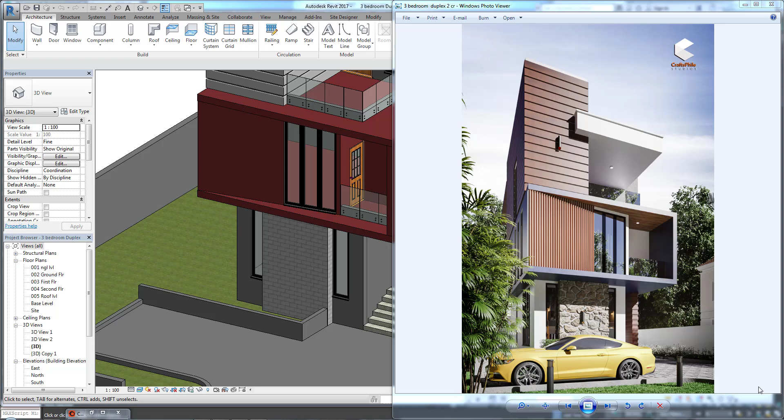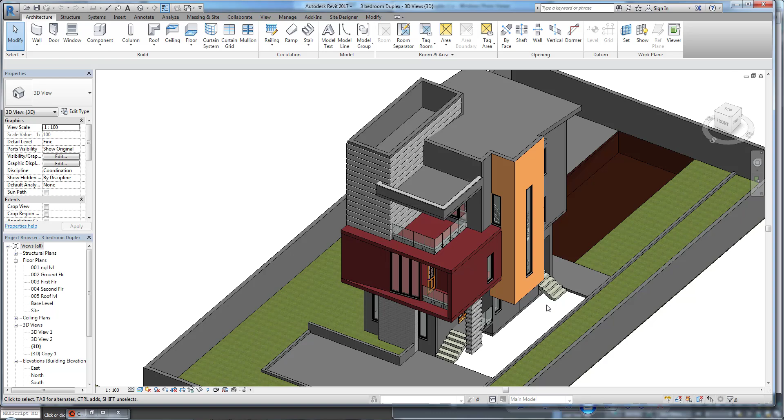If you notice, the model was actually done in Revit. It's quite a simple model, but it's unique because it's just the way it is. The major thing is that we use Revit for most of our works because it is easy to use and helps us quickly put ideas together, and majorly we do design as well, so it helps us manage both 2D and 3D together. That is just why we used Revit. After you're done with Revit, of course you bring it to 3D Max.

In 3D Max you can see we try to create a kind of environment. We put buildings, trees all around, and many of these trees are generated with Forest Pack, and also the grass was generated with Forest Pack as well. We just try to mimic something that is relatable.

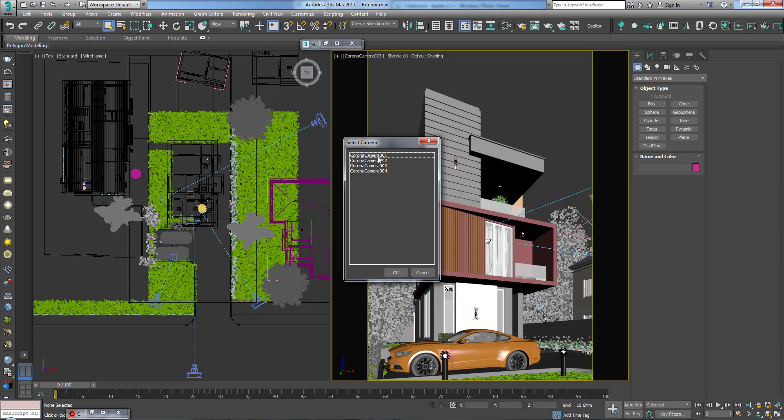After that, the next thing was to place the camera. Of course, the cameras are Corona cameras that we just placed, we didn't change any setting on it, we just placed it and set the frame. So this frame is like this. We have another frame right here, but we are not seeing it yet. Let's just go to the major frame that we need to work on, which is actually camera 3.

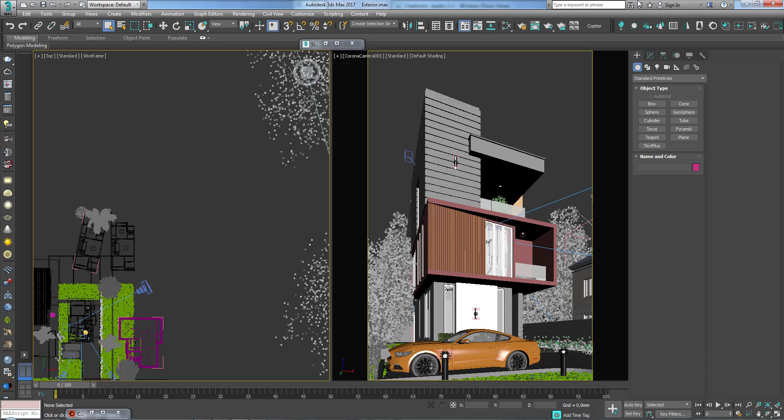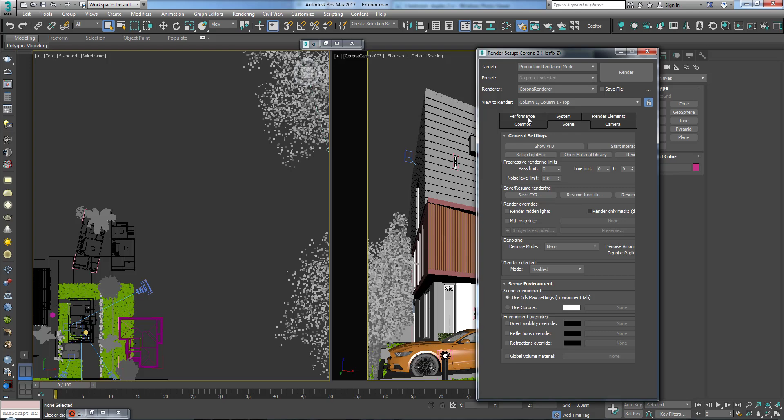Now that we have this and we have set our environment, the first thing to do is to never forget to change your render setup to Corona, because if you import from Revit it will always default to Arnold, except if you are using a version of 3D Max that doesn't have Arnold, maybe 2018 or 2019. So now we are going to change to Corona render, and we have different common tabs.

This is quite very important, the output size. So we set this output size to 1200 by 1800. That works well for us, and the scene, everything is just like this.

One of the things that Corona developers say is that you don't have to tweak anything, you don't need to do anything, you just need to start rendering, and that is what people like most about Corona. So now if I just click on this icon here, which is start interactive rendering in Corona VFB, what it means is that it will start interactive rendering in the Corona Frame Buffer.

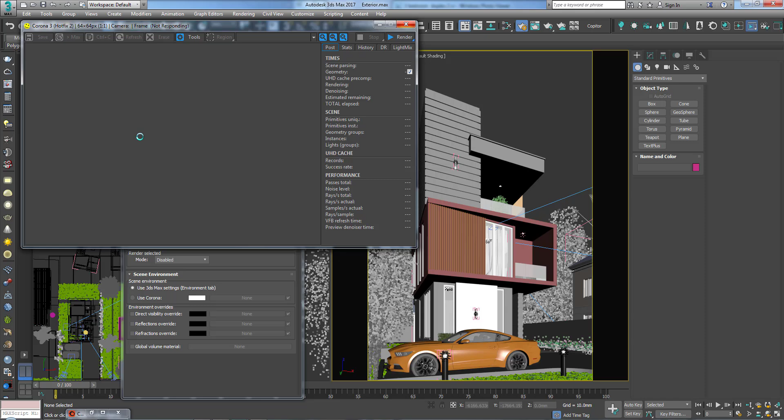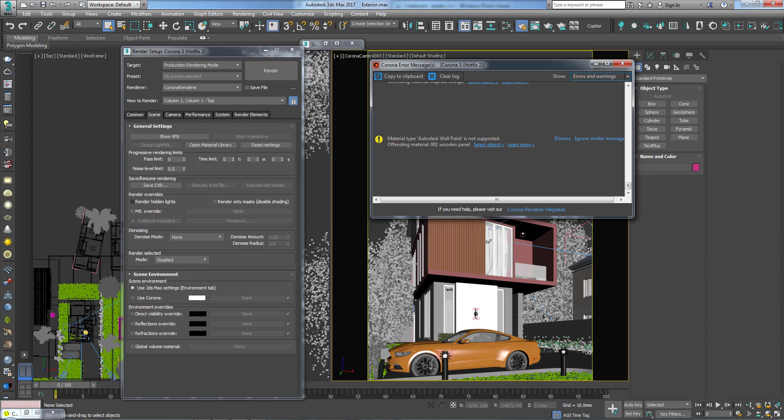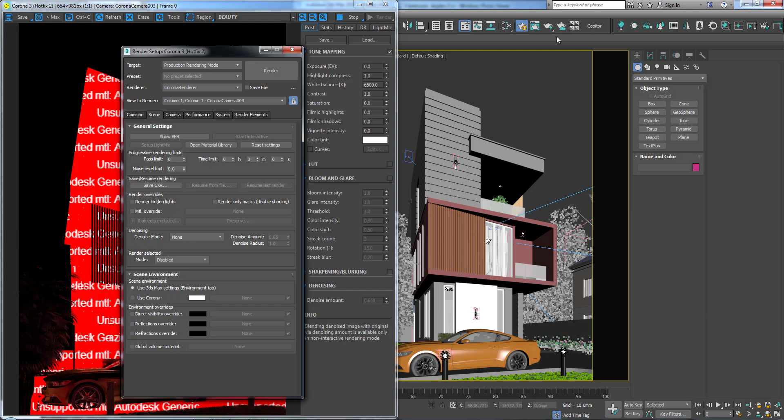It's quite simple. What we can do is just close and come back to the render setup here. In the render setup, just click on material override, click in front of it where it says none, then use a material, Corona MTL, to override everything. So when you use the Corona material to override everything, this is what you're going to have.

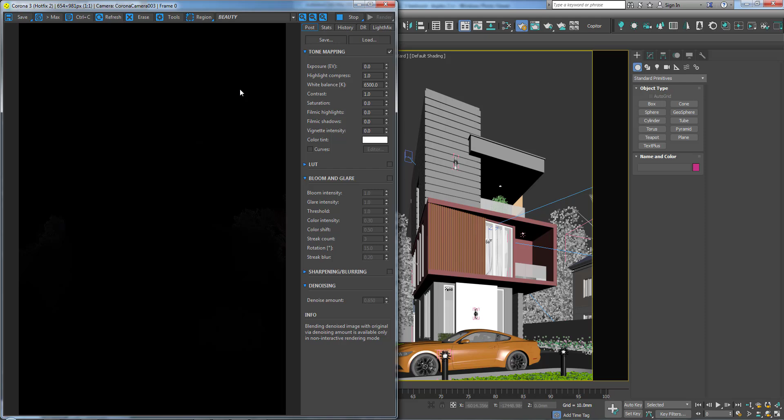Everything is dark, so there's no light in the scene. So how do we put light in the scene? We are going to be using HDRI for this. The HDRI that I'm using was gotten from HDRIHaven.com. I'm not a fan of HDRI, but I find this one to be really interesting, and this is it.

So for the final render, I'm going to be using the 16K, but for a light test, just to test the light, I'm going to be using the 1K resolution. So I have both of them here. You can see Kiara 4 mid-morning, 1K. So I'm just going to drag that.

But instead of dragging it, I'm going to right click here, choose map, choose Corona, choose Corona bitmap. Corona bitmap will lead me to where I can get my bitmaps, and I'm going to just locate it on my computer, I think I have it now in my downloads. And you can see we have this 1K resolution.

This is the one we'll finally use... no, not this. This is the one we'll actually use for the final render, but let's just pick the 1K resolution for now. I'm just going to click OK, I'm not changing anything, so this is the 1K resolution.

So how can we use it? Unlike in V-Ray where you create a light and put it inside, in Corona it's quite simple. All you need to do is minimize that and come to rendering, choose environment, or you can just press 8 on your keyboard to bring it up. So to see how it works, I'll reduce the frame buffer, then I'll just drag this Corona bitmap and drop it into the environment slot, and that is it.

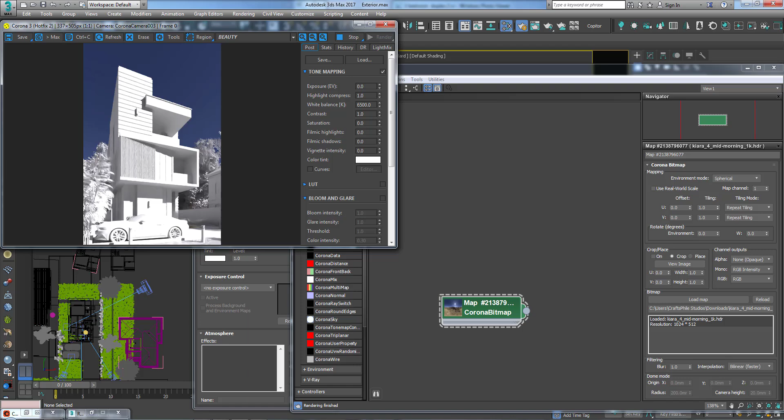So it will automatically be changed to environment map, and you can see we have spherical environment now, and this is the way it looks. If you notice, I actually like the way it looks.

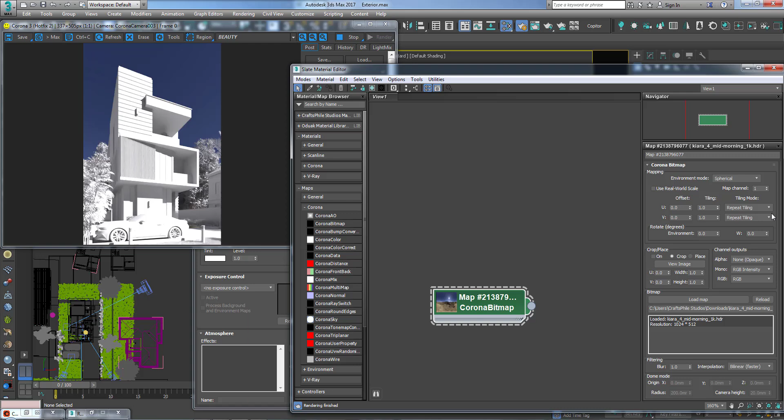I didn't change anything, you can see that's the way it looks, and I'm okay with it. But in case you want to change the rotation, you can just click on the bitmap, even preview it, right click, open preview window, so you see the way it looks. So you can change the degree, 10 degrees.

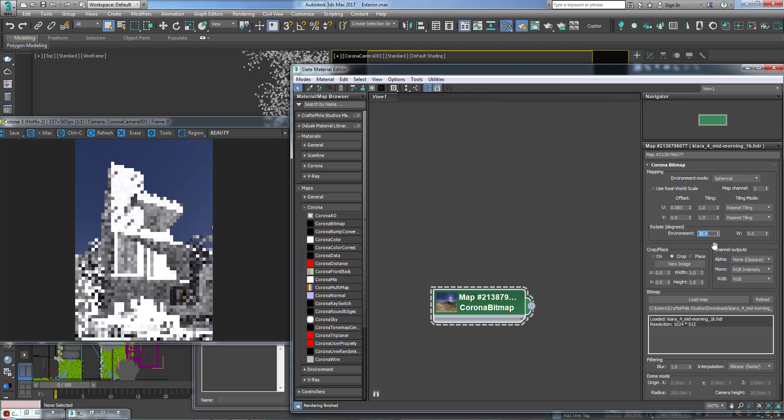We'll be seeing the live updates. Not 10 degrees, 15, 30. The sun will be moving, and you can see the way it is moving here, until you get the position you like. I think this one might work, or it looks like if I put it on 25, you can just play with it anyway. That is just the way it works.

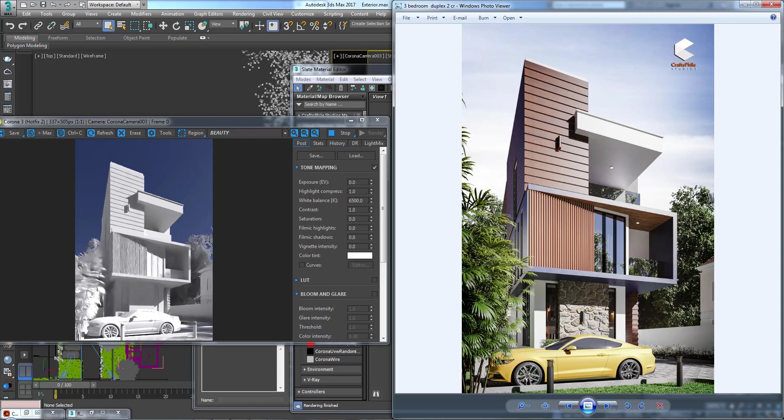I think I like this now. It's totally different from what I have here, but yet it's cool. I can drag it like this. So that is how to create the lights.

Now, normally in a V-Ray tutorial, I always teach that if you want to use it, you need to use this camera setting and all that. But you can actually not bother about that. You can just come to post here. Post helps you do some major post production on it.

So the exposure value, I can put it on 5, for example, and you can see how illuminated the scene is. If I put it on 2, I think that's okay for me, but so many areas are overexposed, so I can come to highlight compression.

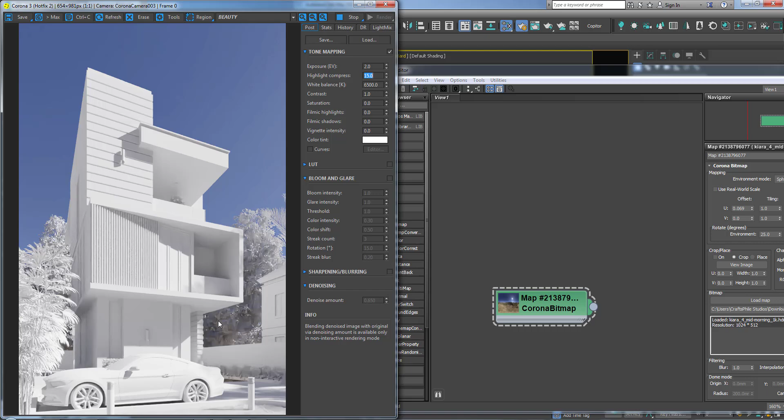I begin to reduce the overexposure on the image, and you can see I have a bright image, but I'm reducing the overexposure. So I put it on 15, and any value after 15 does not make sense because you will not see a significant improvement on it.

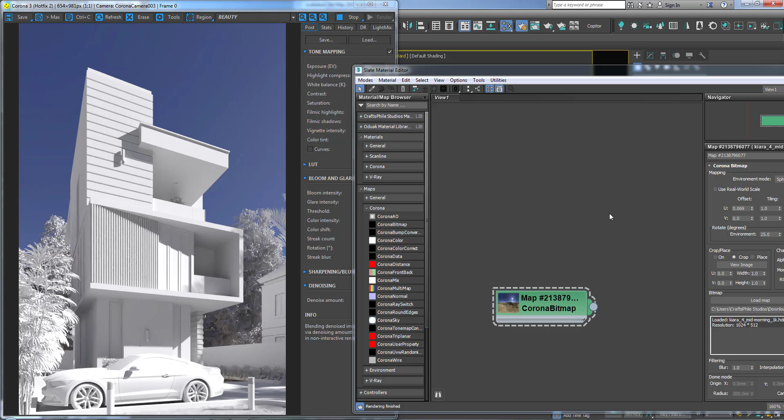On this, I think I left it at 1 here, and this at maybe 1 or 2 as well. So I have something strong like this. It's quite simple and easy. You don't have to be a guru to actually know how to do this.

That is just about lighting for you. If you have any other thing you want to do about lighting, of course you can go ahead and do it. But this is quite simple and straightforward in how to use Corona lighting.

Of course, what if you don't want to use HDRI? I'm not a fan of HDRI like that, but in this case I find it very, very interesting. So what I'm going to do is come back to the displays and choose Corona Sun, drag it. That's the way it works.

I put that there, so of course I can change the rotation to whatever I think is okay for me. If I do that, you'll see there will be some kind of conflict with Corona Sun and the HDRI. I've seen a lot of people using both HDRI and the Sun together, and I cannot say it's wrong, but it is not useful in all situations. You need to understand the situation that is making you use it.

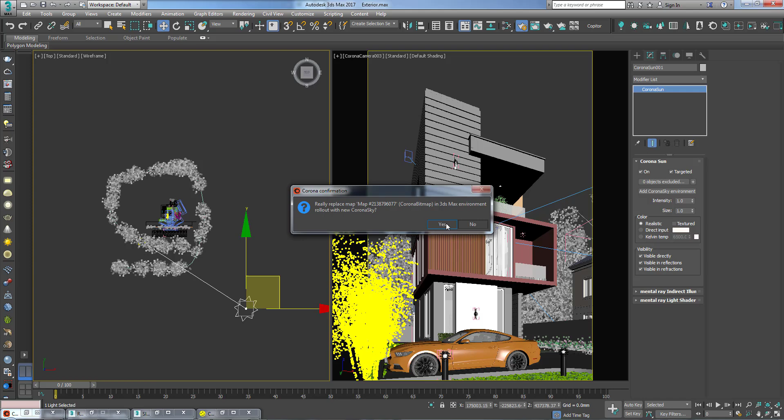So in this case, I'm not going to use them together, I'll pick the Sun, come to modify, and click add Corona Sky environment. It tells me there is a map in the environment, which is the HDRI that we added, so I'll click that it should replace it.

Now let's see what we have. So we have the Corona Sun now. You can see the Corona Sun is quite crazy, everything is blown out. Let's try and put 10 here first. You can see, even though our highlight is compressed and overexposure is reduced, the image still doesn't look good.

So I can actually put this exposure on 0, or let's say -1 or -5. Oh, -5 is quite too much, so let's put it on -2. I think -2 is okay. And I can begin to set it and try to find a perfect place for my Sun.

So that I'll see something cool, but it all depends on you. One thing I'm noticing here is I don't have a sharp contrast, unlike the HDRI. If you want a good contrast, you can set the contrast value here, let's set it to 5. Now you can see we have something similar.

Whichever way you are trying to use, none of them is bad. Okay, that's too much, so you just play with it. It's actually interactive, and that's one of the things I like about it.

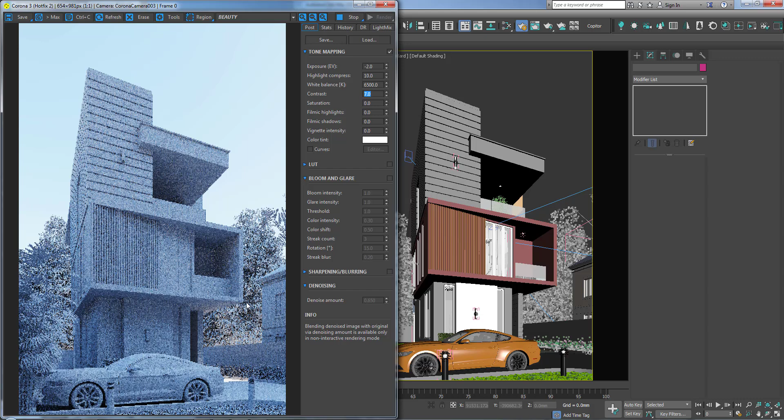Now I'm going to go back to the HDRI because that's actually what I used, so delete the Sun. If I delete the Sun, you'll still see we have illumination coming only from the sky. This also really helps if you want to do an evening kind of setup, you can use only the sky to mimic that.

That is really, really nice, that is cool. And of course you can do that in V-Ray as well. So now let's just go back and go to the exposure control and add the sky from the HDRI.

And now we should not forget what we did, which is actually 1, 2 I guess. I think this is on 0. Oops, sorry, this is on 1. Okay, this is on 1 as well. I think this is on 1 as well. Okay, you can see everything is okay. I like highlight compression now, I can actually put it on 2 or even 5. Okay, then put this on 2. I think I'm okay with this for now. If I have to change anything, I can change it while I'm rendering.

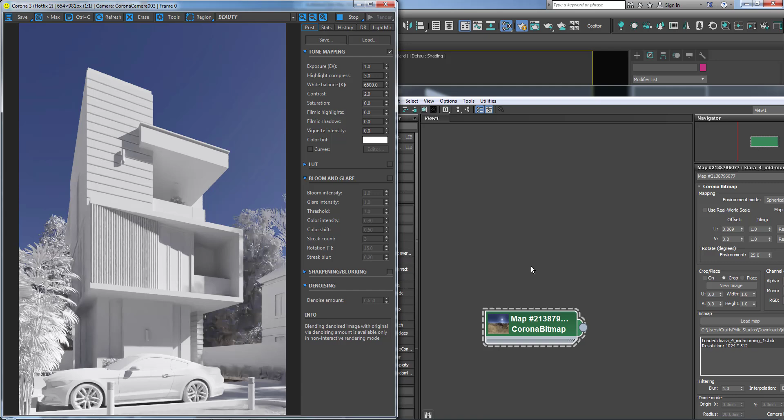So that is just the basic lighting setup. So we need to just move to the material. Looking at this time now, I think this tutorial is going to be more than 1 hour. So let us see what we can do.

So for this, maybe what I'll do is stop this tutorial right now just for the lighting, and in the next session we are going to be looking at material so that the tutorial will not be too long.

One of the things I also want to tell you is that if you notice while we are rendering, we are not seeing some details, but everything looks smooth. It is because Corona by default is using NVIDIA denoiser, which helps you quickly remove noises from your scene so that you will see clearly. And this is what they call look development.

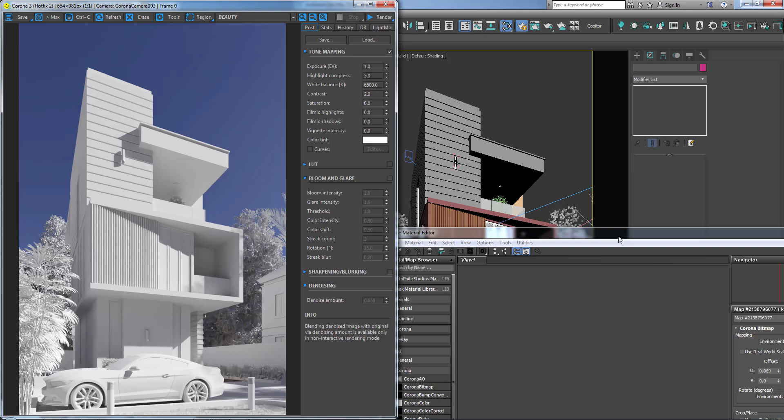Before I stop as well, I'm going to just stop the interactive rendering and quickly show you how you can create a pavement with gravel using Forest Pack, if you are not familiar with Forest Pack before. But if you are familiar with Forest Pack, of course this will not be an issue for you, you already know how to do it.

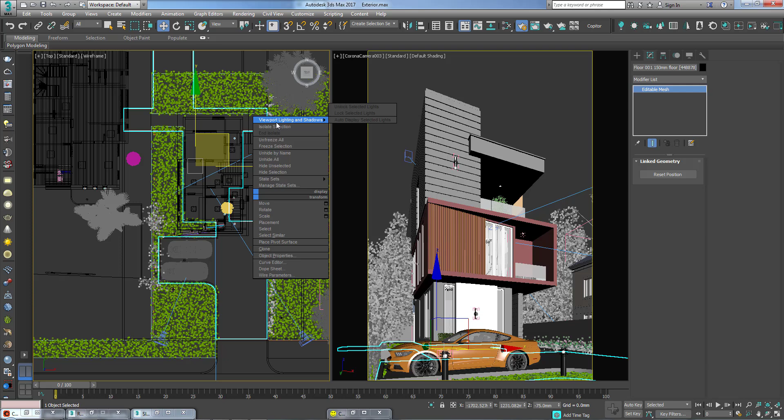So a space is left here. If I pick this floor, I can just isolate it. So I left a space here for the gravel. I can just come into the 3ds Max command panel here, pick shapes, and click lines.

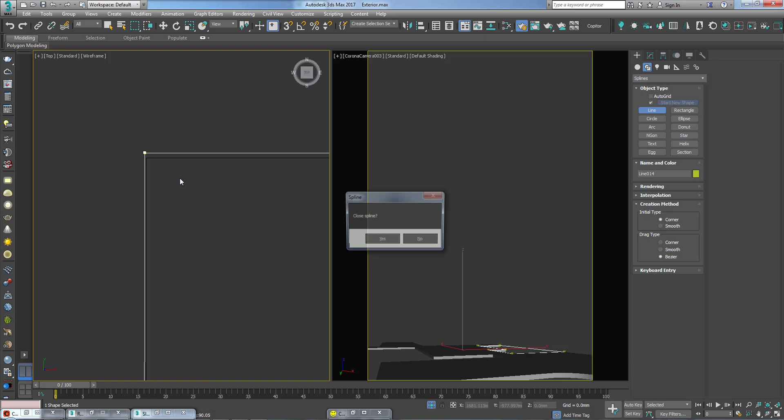So I'm going to press shift and just start. So put it here, put it here and here. So it formed a closed spline. And also I'm going to create another rectangle, just put this one by the side for now. We are going to see what we want to do with that.

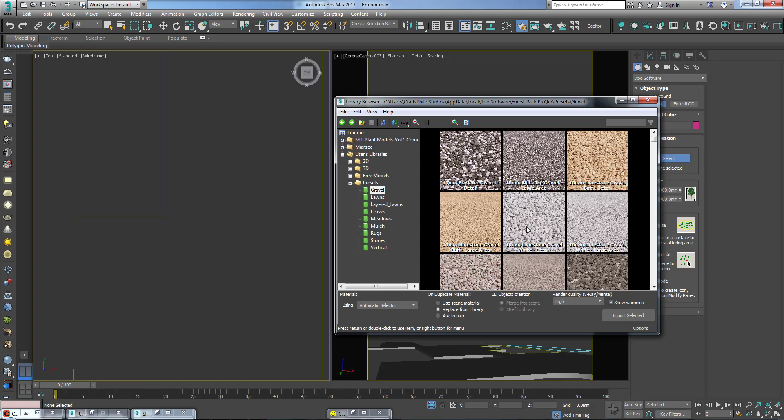Now you can come to iToo Software Forest Pack, then you select. Of course, I loaded some of my Maxtree models into Forest Pack, but by default you should have some of the presets, so gravel - I like to use this one, I don't know why, I just like the blend of colors on it. Of course if you want just a white one, you can see them here, but I'm going to be using this one. So just select this.

Click OK because I'm using millimeters on my computer, so the unit is quite different. So now it generates that gravel for us.

Now the next thing to do is to work with this. I'm just going to apply a floor generator on this. So you see the way it looks now. I'm going to place it here. Let's see how big I want it to be. So I don't want it to be too big.

So if I come back to the rectangle, I can actually reduce it to like 1.5. Okay, so I want it to be 1.5. So let's go back to the floor generator. So here I'm going to put 1.5.

And we are not seeing it well, so let's come out. The offset, the minimum offset, I will put 0, so there's no offset. The width, I'm going to put like 600. Let's see, 750. Then we use grout, so for the grout I'm going to put 100mm.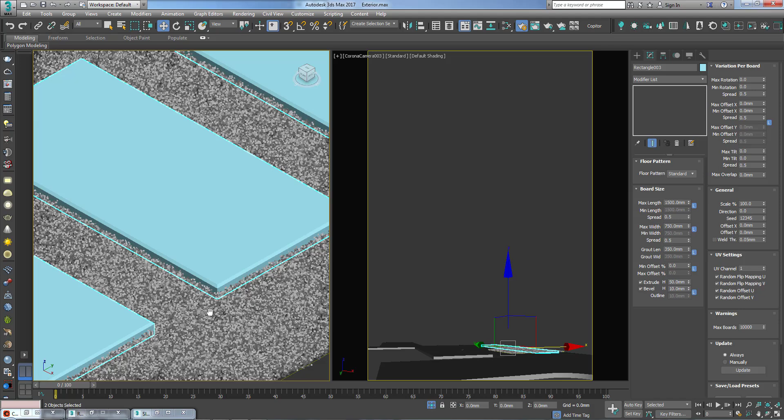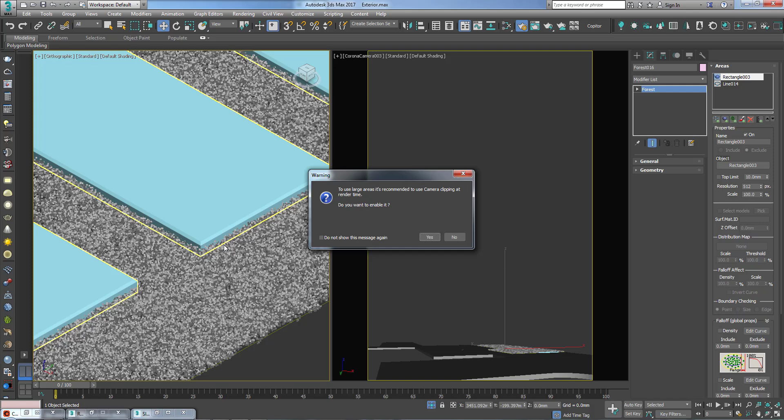So I have that, I can just move it in like this. You can see. So I can leave it that way, or better still, I can pick the Forest Pack and come to Areas here. So I'll just click add a new object, and you can see this is exclude - it means that if I pick a solid object like this, it will be excluded. So I'll just pick it, and it's trying to say I should use camera clipping - I'll click no.

So now if I move it out, in and out, it doesn't seem like it's changing, but let's see - we already have this, so it will cut out all these areas, and that is cool. That is quite nice. I just want to quickly show that for those that might be looking for something similar.

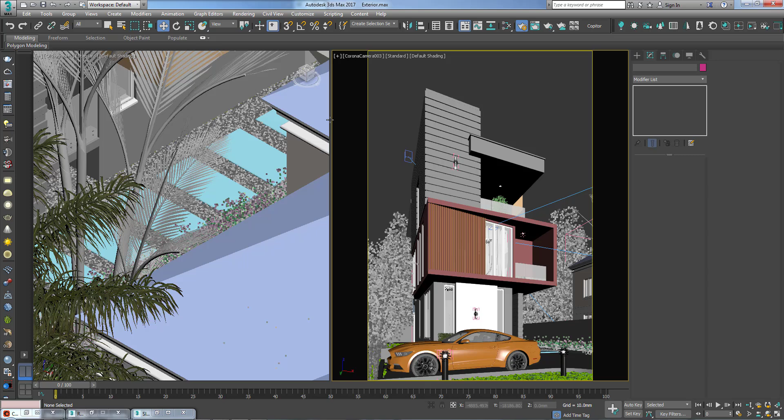So now I'm going to end this tutorial here, and in the next tutorial we are going to delve into material creation. Thank you.